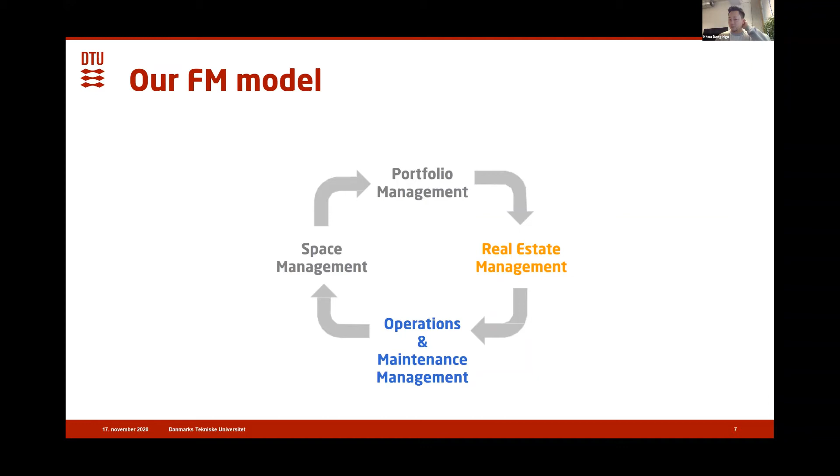And when you put a layer of digital on this model, then we are not only talking about technology. This is what I call it, actually we are educating engineers. So I have a formula for this, trying to simplify it, because BIM is not only about technology or programs or applications, digital is not only about programs, technology, or applications.

It has to support processes. It has to add value for the humans that are driving this business improvement. And you have to adapt it for the existing policies, or you have to change policies, regulations, laws, or standards, execution plans, or guidelines. That is what policies is all about. So when you're talking about BIM or digitalization, it's a combined element of these three elements. And it's not about what came first.

It follows each other. So whenever you apply new programs, you have to look at the processes and the policies. Or if you apply new policies, you have to look at the applications and the processes attached for new implementation of policies. This also applies for the phases of our facility management circle. You have to apply this for the concept phase, the design phase, how to use the right applications that support the right processes along with the right policies. The same for construction and operations.

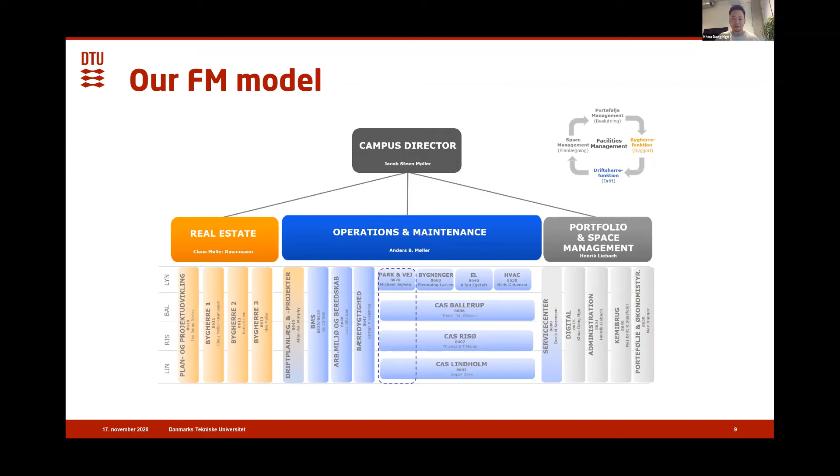To talk about space management, this is my Achilles heel. If we don't have the knowledge on how important space management is, that will ruin our business.

So I often ask myself - not anymore, but everybody else across sectors, not only the built environment, but also finance, also tech, also medical - what is your master data? You have to ask yourself that. What could ruin your business?

Our business in campus service is space management. If you don't know how to classify room parameters in BIM models, that will ruin the operation and maintenance at a later point. And if you don't know what the spaces consist of in an operational BIM model, then our operational staff cannot go to the specific place to solve specific tasks. Task is related to a space. Every task in the facility management model is related to a space. So that is the thing I try to talk about with all my colleagues, our consultants and contractors.

Space management is our most important thing, and we use classification combined with spaces as well. I'll come back to that later where we talk about operation and maintenance building components in the delivery phase.

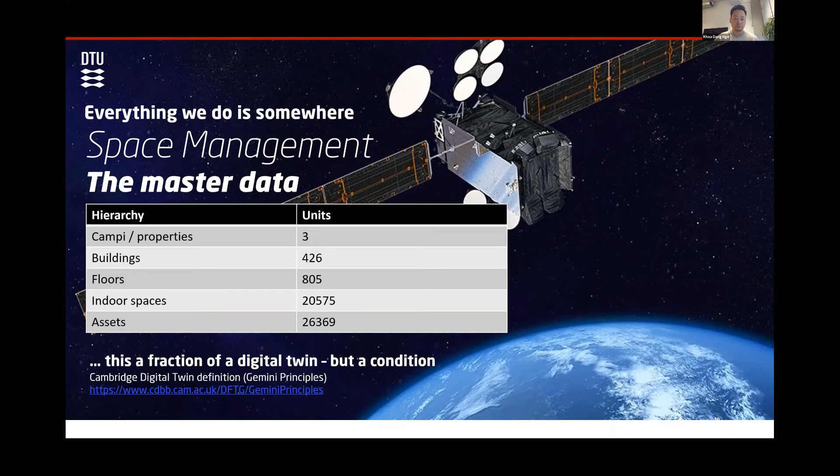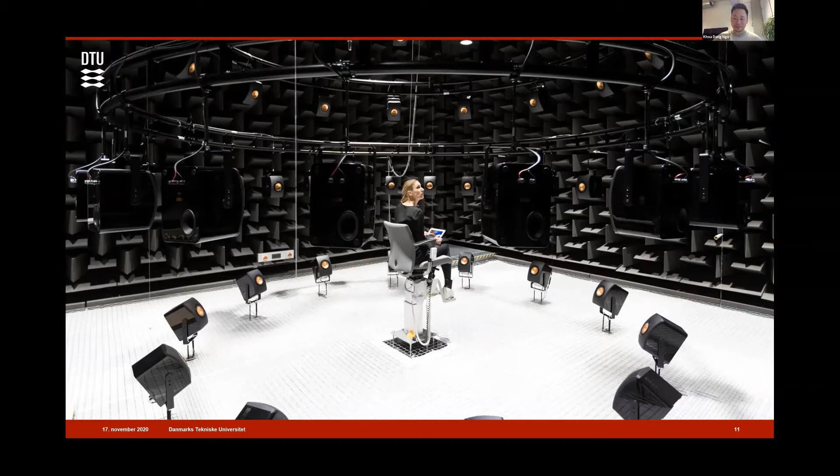Some quick pictures of our university, just to let you know what we are building and constructing. We have very different facilities that have to support all our researchers and professors. This is something with speakers, I don't actually know what it is, but some clever stuff is happening here. Here is some other researchers, I don't know, looks like water, and some clever engineers trying to fix the world.

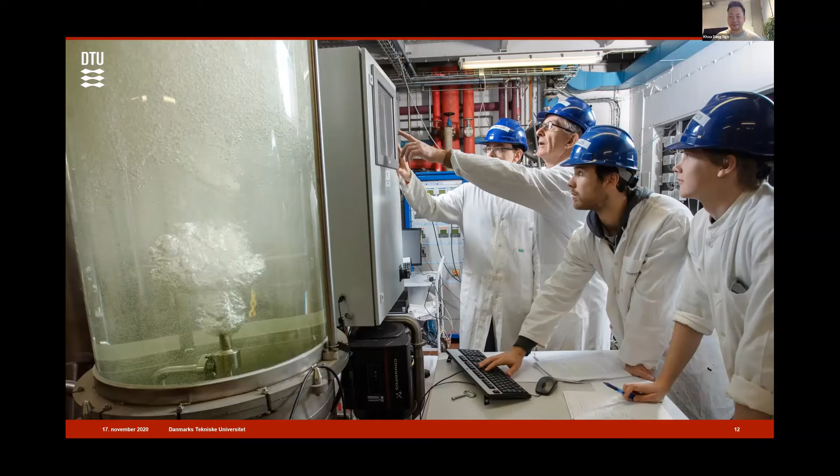Another kind of facility, some other clever students. Robotics is another subject for our university. Besides that, we also have normal study areas for bachelor students, informal learning facilities that invite for other ways of learning, not just listening to a professor. Group activities is also a big learning subject, so we try to make facilities that support that kind of group work.

Now for our building 310, it's marked almost in the center of our university. This is our campus in Lyngby, our main campus. As you can see, this is a mathematical coordinate system. You have an x-axis and a y-axis, and in the middle we have an origo. So we have first, second, third, and fourth quadrant. Very engineer-like, but that's how they planned it in the 50s and 60s.

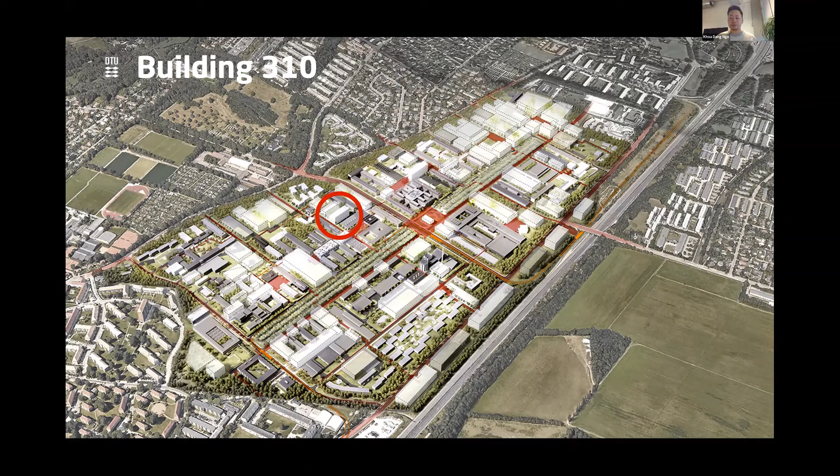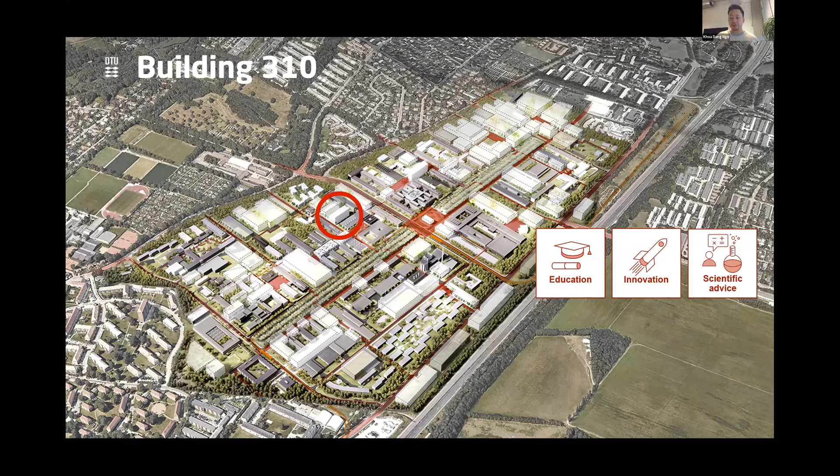The thing that we do at DTU is educate people. We are doing some innovation. That's why our core activity is to educate engineers. We are doing scientific advice, so we also have societal obligations on how to advise different stakeholders in our society with our knowledge. And one of our main activities is research as well.

So 310 is a research building that has to support DTU Physics, where we are doing something about environmental, energy, green, sustainable research. I'm not very sure about the specific thing, but it's DTU Physics that has this building.

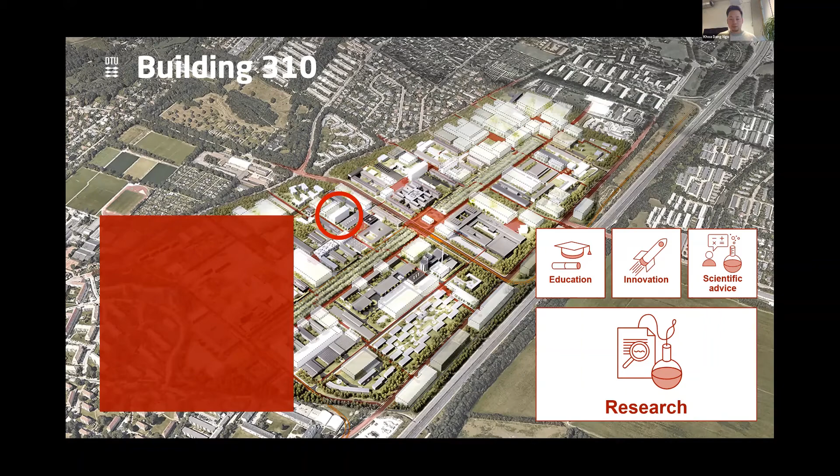From the very start in 310 we set all the ambitions, and when you have an ambition, you also have to have a purpose that has to solve something. We needed digital tools to manage a large portfolio of building data, not only for this building but for the whole university. And when you decide to have a high level of ambition, you have to bring it in from the start of the project, all the way to the pre-qualification and the tender process.

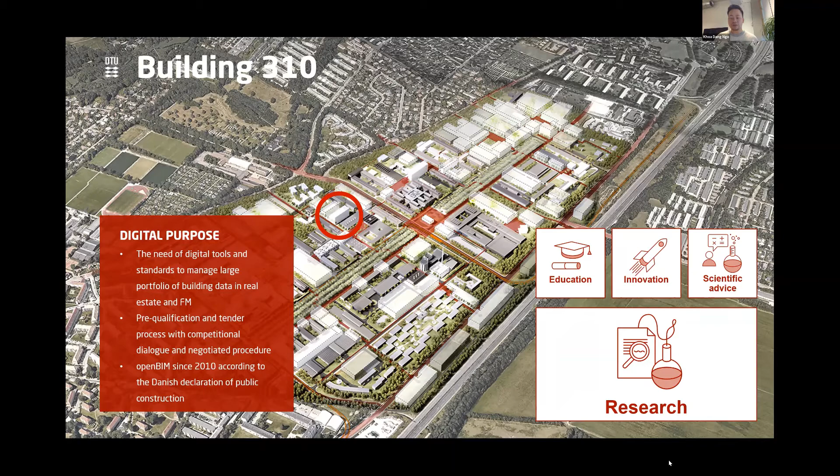This is the first way we in Denmark tried to involve and have a dialogue in the tender process, not just to deliver a bunch of documents that you reviewed, but we invited more open dialogue about how we wanted this building to end up. As I mentioned before, this is a regulation - the Danish government said that we have to use open BIM since 2010. So this was a natural thing to have this digital ambition.

The competition, or the tender process, was a competitive dialogue where we invited three teams. We tried to mimic the IPD from the United States, but whenever we try to implement new stuff, the legal side has to follow along, and the legal sector is very conservative, so they have to rely on other projects before they try something new. So that was one of our issues - we didn't do a full IPD, but we did try to involve stakeholders very early in the process.

Early involvement and collaboration was a keyword on this project, where we involved the contractor in the design phase to make early reviews on the consultancy's BIM models to say, this is possible, this is not possible. The contractor was MT Højgaard - I don't know if they exist in Sweden. We have Christensen and Company, which is derived from Henning Larsen Architects, and we have MOE Consulting Engineers as the engineering consultancies.

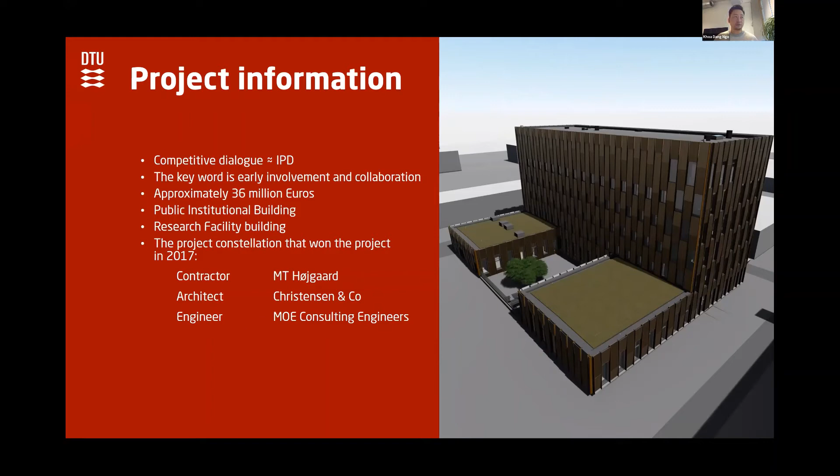The thing that we tried new was the way we had digital collaboration very early in the process, where we took in specialists early to make this construction constructible, if you can say it that way. And when you involve stakeholders so early in the process, that needs a well-coordinated BIM model where you're using different applications. That is why IFC was used - we are requiring IFC not for the sake of operation maintenance, but for the sake of how people collaborate and exchange data throughout the project.

In the very early phases we had weekly ICT meetings, or BIM meetings, where we reviewed the model, uploaded the model, and had a talk about it, because we knew that investment early in the process would benefit later on. Talking about mistakes, we had another building earlier, of the same complexity, but we had almost double the mistakes compared to this project, because here we used the BIM model in a better way. The other project also used BIM models, but didn't have the early involvement of every stakeholder. So BIM pays off.

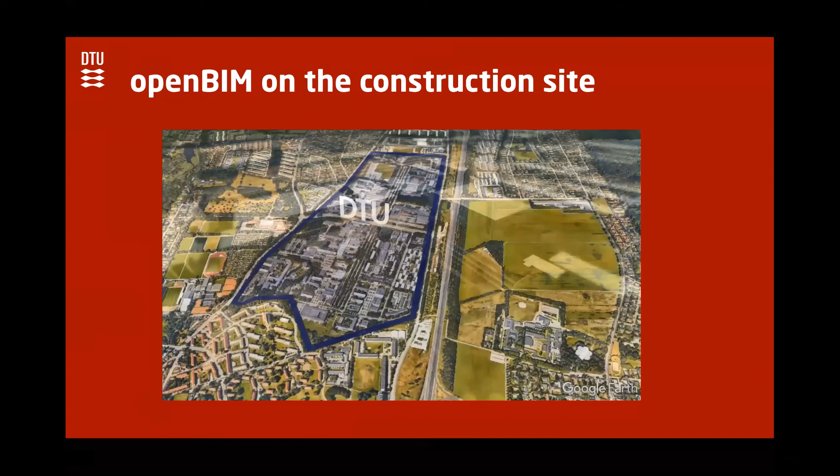The university has many employees and students who travel in and out by foot, bicycle, and by car. Because of these factors, we have to optimize our traffic and logistics to provide a safe environment during the building period.

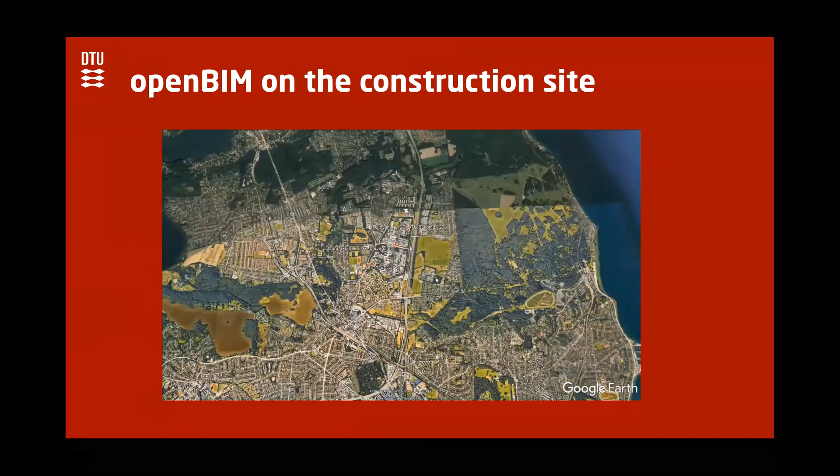In order to maintain consideration for the different types of traffic, we have a specific focus on the management of heavy vehicles and extra traffic produced by the delivery of materials and equipment. Furthermore,

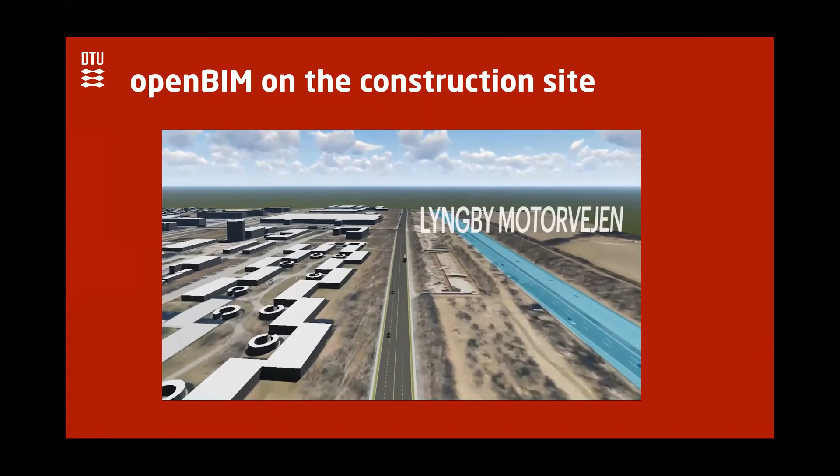we will have a focus on the management of the building site with a keen eye to workplace environment and safety. Deliveries are made to the building site typically from the Lyngby motorway and along Lundtoftegårdsvej, each from the north and south approaches. To facilitate safe conditions and minimize the number of difficult turnings, heavy vehicles will use Anker Engelundsvej.

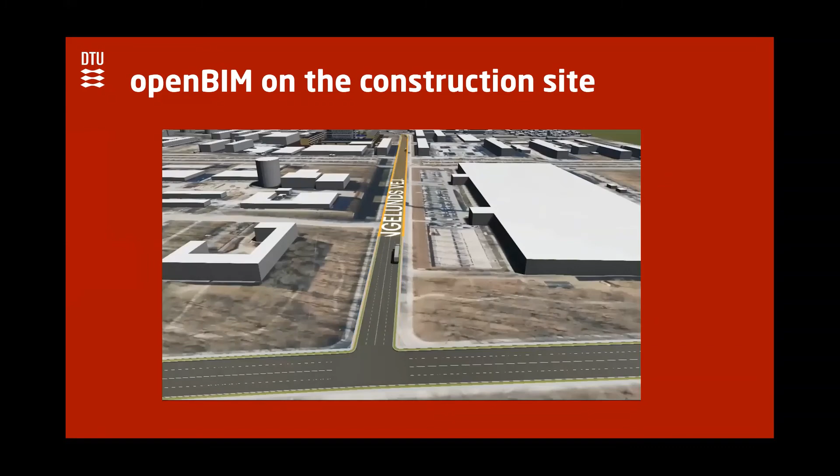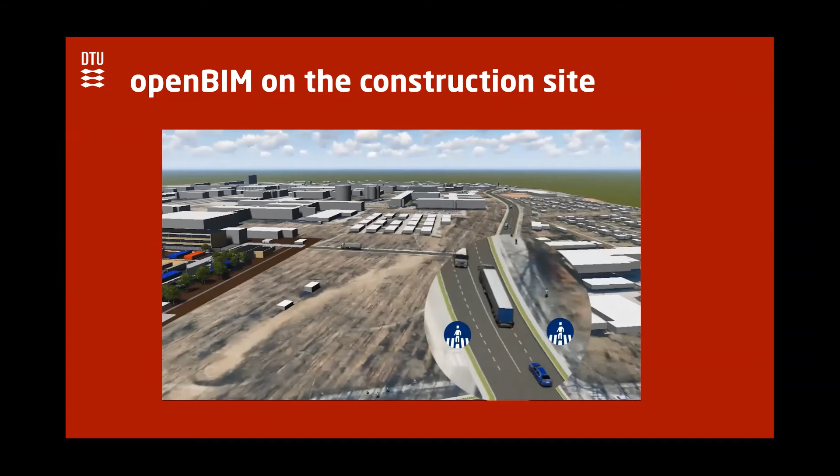From here, they will turn left up Lundtoftevej, where in the mornings there will be particular attention to students passing at the junction of these two roads. After finishing 2 left turns, leading to Fysikvej, vehicles can enter the building site.

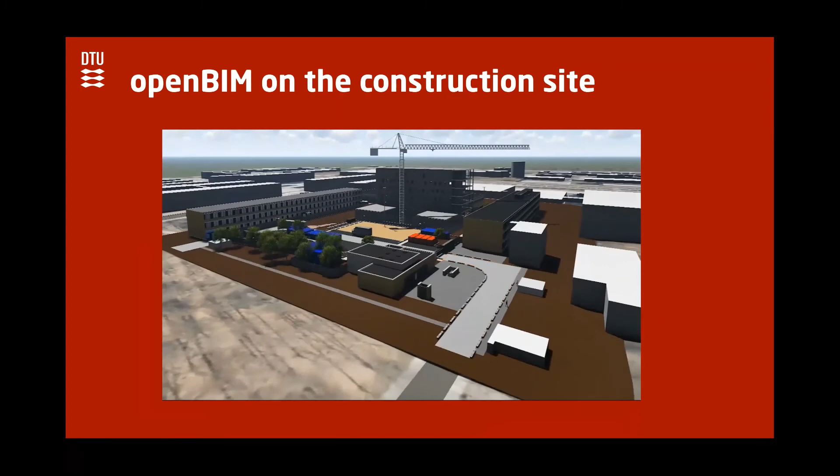On Fysikvej, which is a very narrow road, we will use concrete blocks to separate the traffic from heavy vehicles. Upon arrival at the building site, you will be met by a controller who will steer traffic to maintain proper flow and organization.

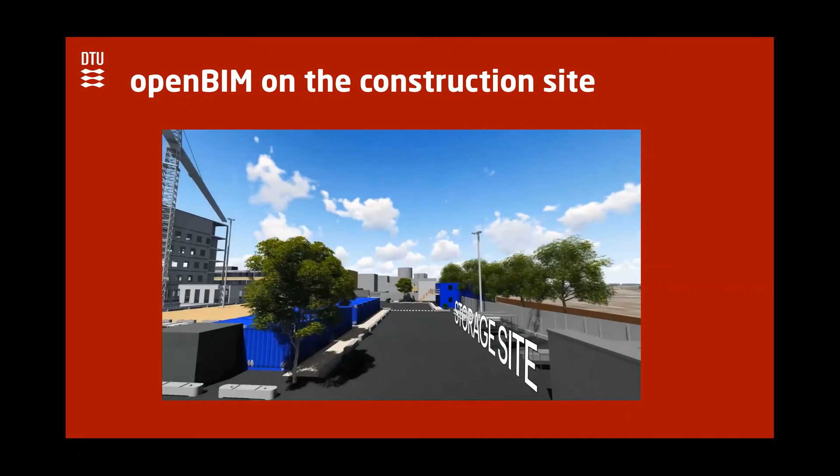Once the controller is passed, vehicles will continue straight to unload, for example, concrete elements in designated delivery area. Once ready, they will loop to the left around the blue material containers where smaller deliveries will be made, and so leave the building site via the same route. This way, we can secure an effective and fast one-way system for deliveries.

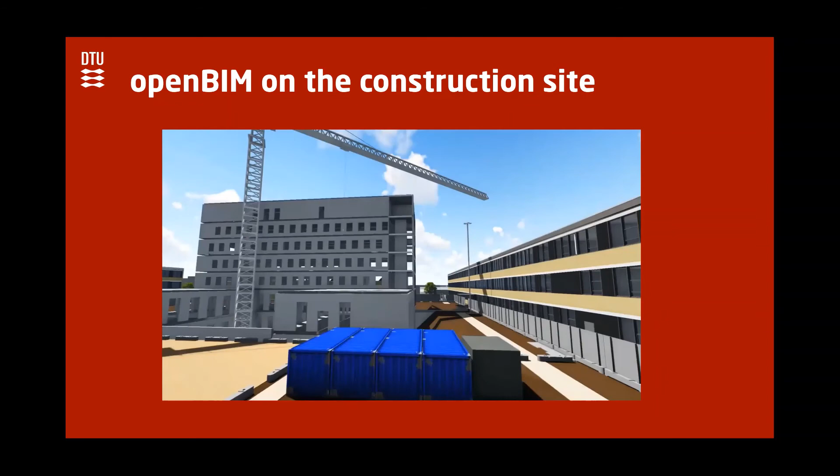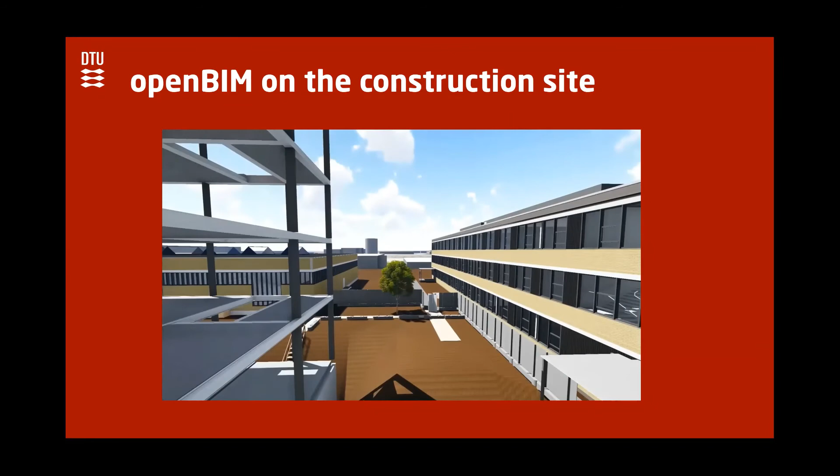In this phase, we shall be working via a ramp for the excavation of the building. When navigating the building site with safety shoes, helmet, and vest, persons will be directed by the orange pathways.

All deliveries and contractors will have their own material containers in the building site, and the construction management will be set up in the pavilion building next to the Mathematics Tower.

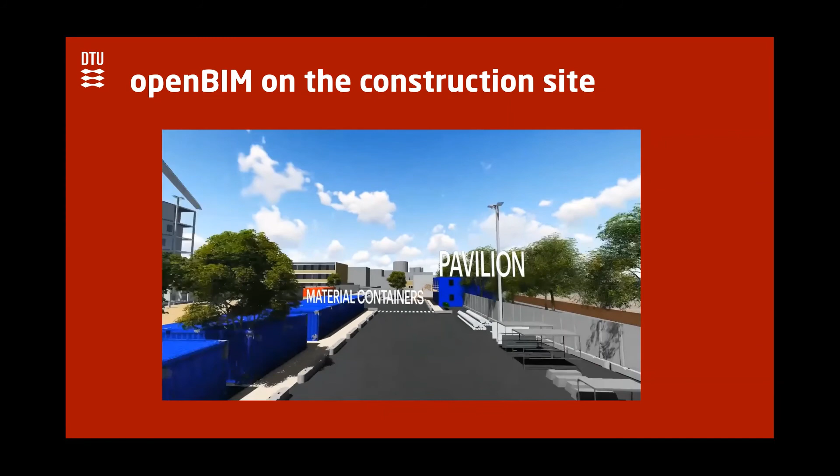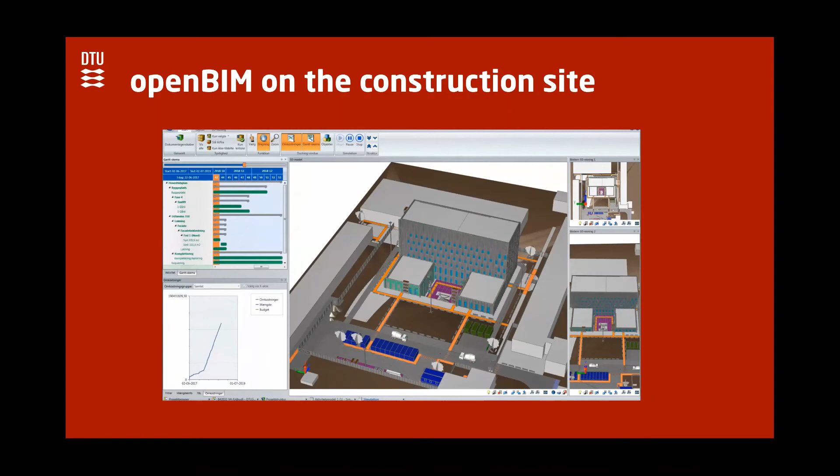3D models and simulations help create a better decision base, not only for the entire project team, but also for our client at DTU. It is crucial to simulate the construction process visually in 3D, thereby enabling optimization opportunities and minimizing risks. Once the construction process becomes visual, all skills and expertise can come into play and contribute to the value creation on a fast-paced basis.

Based on the project team's integrated digital collaboration, we are building virtual before we do it on site.

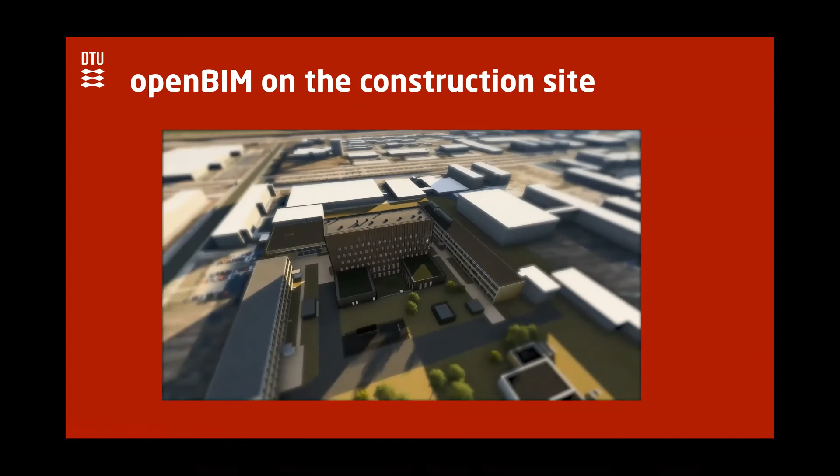How did it look? Was it okay? It was okay, it was good. Good, Khoa. Perfect. I think we got another 5 minutes if that's okay. That's more than perfect.

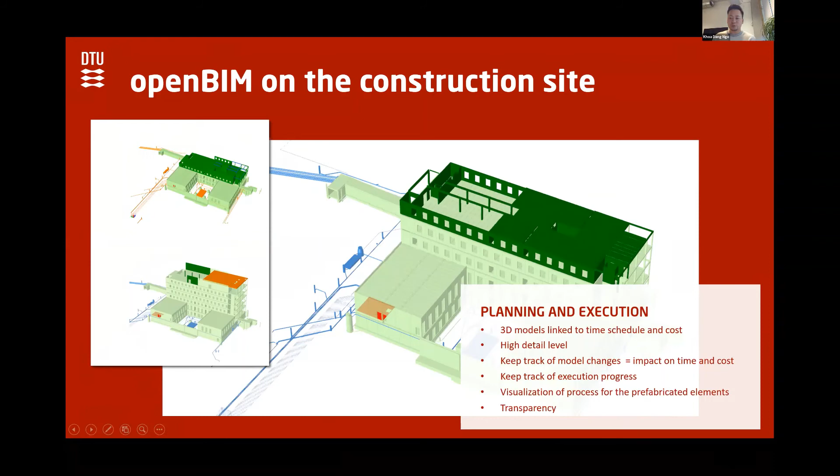All right, this slide was also communicated in the models, in the videos. I'll jump through that one.

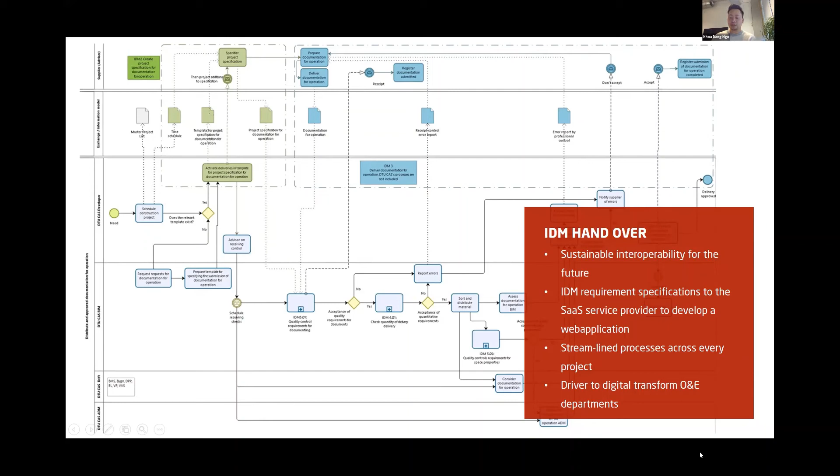You have a BIM model. Whenever you have a window, it will create a building part sheet where you add data on. This is connected to the model because we have the right classification. If you don't have the classification, then the data delivered for the building component is not related to the model.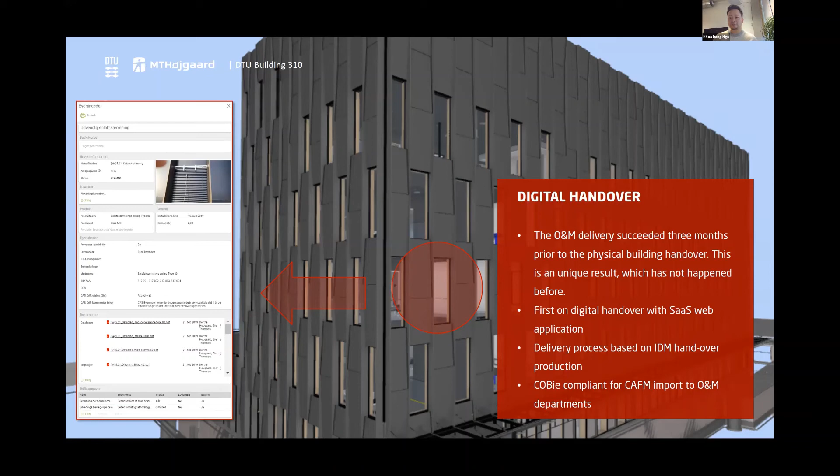This is one of our key requirements for our consultants: remember to classify all our buildings. This is how it looks in list form. It doesn't look very BIM-like, but it is connected to the BIM somehow. Then you add files on the left. You can deliver files by attaching them for a building component that is related to the BIM model.

On top of this, you have workflow management, so you can exchange data with the responsible stakeholders in the value chain while building the construction. On 310, we had the first delivery 3 months before the client requirement deadline. That's a very good success, but we can do it even better now.

Even though it's delivered, there are some quality issues still, but it's an easy way to deliver, because on our previous projects we could wait sometimes 2 to 3 years before getting the data. So that's an improvement, I can say.

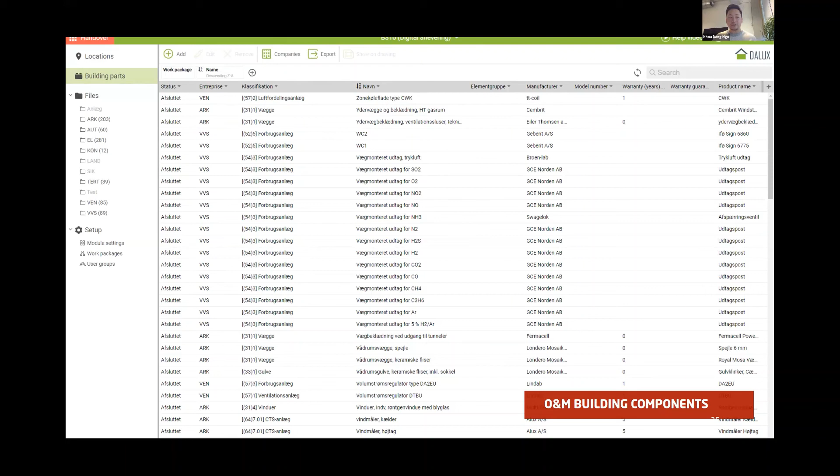Operation and maintenance in BIM requires classification. We are having issues communicating types and instances in BIM models, because whenever it ends up in operational departments, it's all instances - every single building component is unique. But in the design phase, not every single component is unique, because you're working with types and Revit libraries.

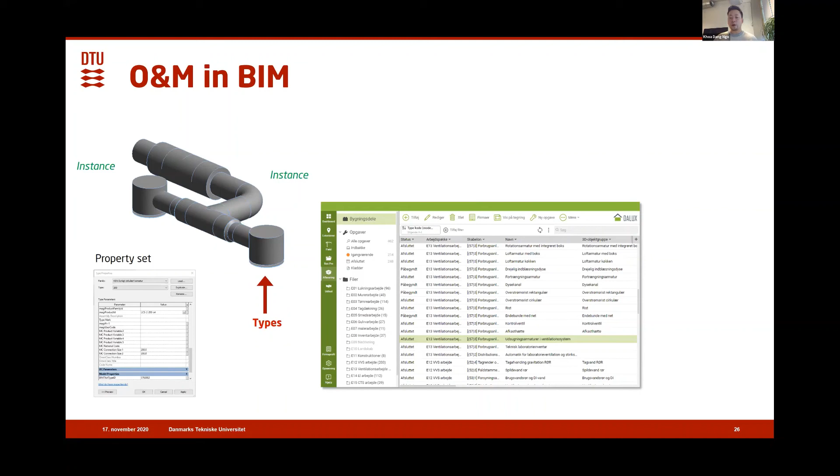Whenever you put an object from the library, it becomes an instance, and then it has a system connected to the whole ventilation system, water supply system, or electricity system - all connected somehow, and connected to the space. That's why space management is so crucial. You need to know where it is in the model, or else we cannot do the maintenance task once the delivery is finished.

As you can see, the marks on Revit are the classification carried through the building component on the web application that the contractor delivers data to. Once this is finished, it's directly imported to our facility management system, where data is extracted from the model and put on the right shelves, so it's accessible for the needs of every single operation department.

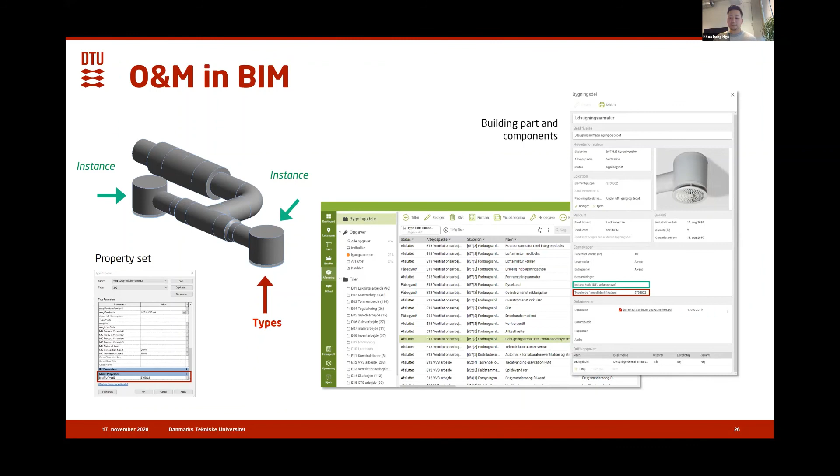Yeah, and then I have 2 minutes. All right, thank you, Lars.

This is the next thing we have to do for our digital transformation: whenever we have data, we can use data for a lot of stuff.

That's why I talk about intelligent data maintenance or data management - if you have insights on what happened, then you can predict. Whenever you can predict, you can apply actions on predictions; that's what you call prescriptive analytics. But you need data governance to have this overview and a foresight or ambition to do something with your business that is supported by data.